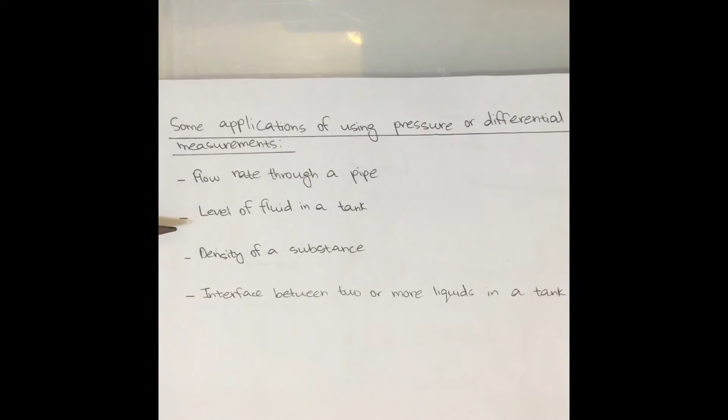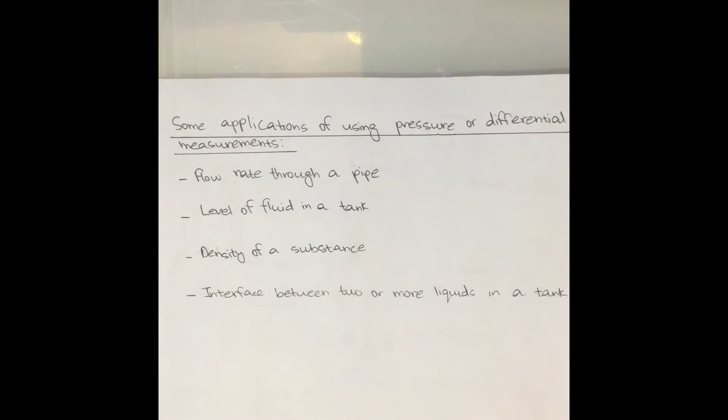It is important to accurately measure high pressure in many industrial processes to ensure their safe operation, to ensure that they work efficiently, and to ensure optimal quality control. Some applications of using pressure or differential measurements include measuring the flow rate through a pipe, the level of fluid in a tank, the density of a substance, and the interface between two or more liquids in a tank. In this video, the high pressure which we will be looking at is in the order of 100 bars and upwards.

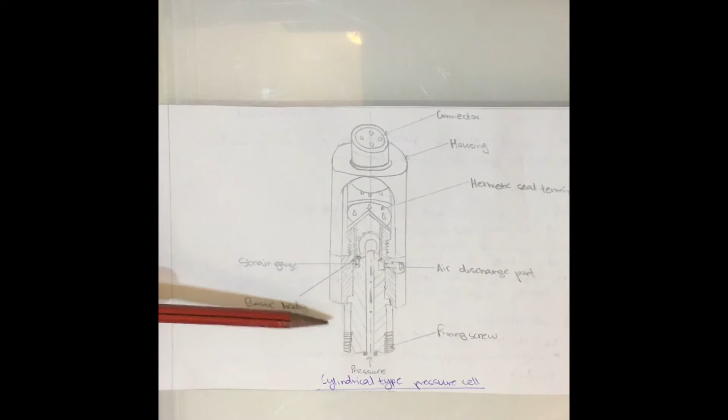The first type of gauge we are considering is the cylindrical type pressure cell, which is an example of a strain gauge. The main parts of this arrangement are as follows. It consists of a cylindrical tube with a hexagonal step at its center. This step helps fix this device onto the place where the pressure is to be measured. The bottom portion of the cylindrical tube is threaded externally and is open to receive the pressure to be measured.

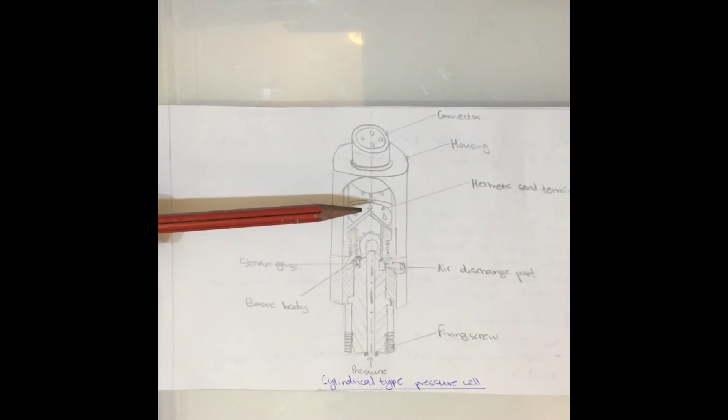The top portion of the cylindrical tube is closed and has a cap screwed to it. On the periphery of the top portion of the tube are placed two sensing resistance strain gauges. On the cap, which is the unstrained location, are placed two temperature compensating strain gauges. Now coming to the working of this type of gauge, the pressure to be measured is applied to the open end of the cylindrical tube.

Due to the pressure, the cylindrical tube is strained, that is, its dimension changes. As the strain gauges are mounted on the cylindrical tube, the dimension of the sensing strain gauges changes proportional to the change in dimension of the cylindrical tube, causing a resistance change of the strain gauges. The change in dimension of the cylindrical tube is proportional to applied pressure. Hence, the measurement of the resistance change of the sensing strain gauges becomes a measure of the applied pressure when calibrated.

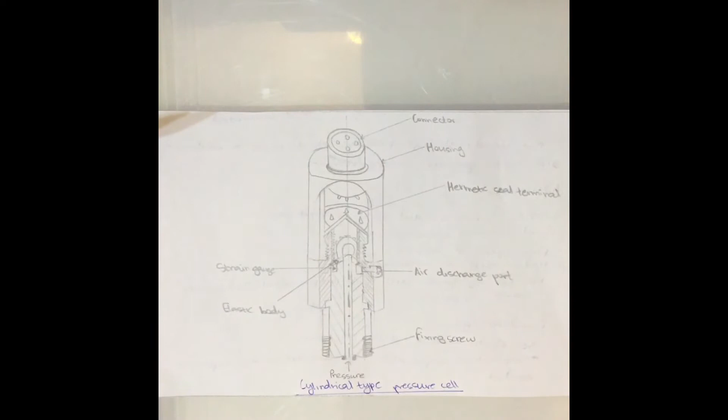The next instrument we will be looking at is the Bridgman gauge. This is used to measure extremely high pressures. The gauge must also be used at a constant temperature only and generally has an operating range from 0 to 1000 megapascal. But it's only usable at high pressure, as at low values of pressure the change in resistance value is very small because of the small value of the pressure coefficient of resistance.

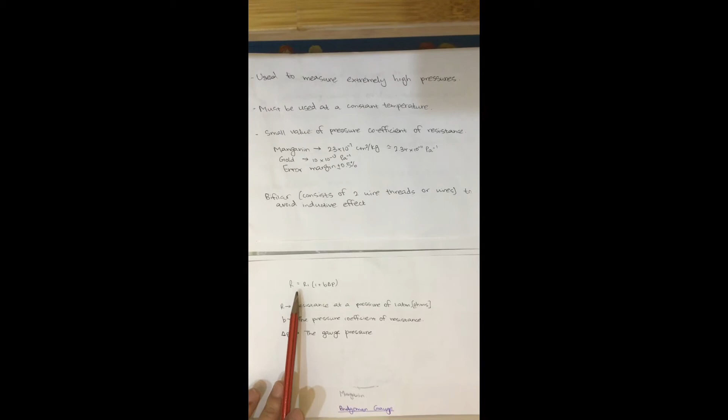It is known that resistance of fine wires changes with pressure according to the following linear relationship: R = R1(1 + B ΔP), where R1 is the resistance at a pressure of 1 atmosphere, given in ohms, B is the pressure coefficient of resistance of the material, and ΔP is the gauge pressure.

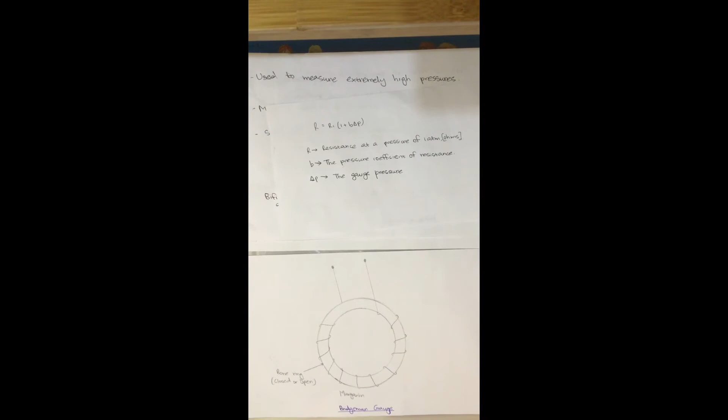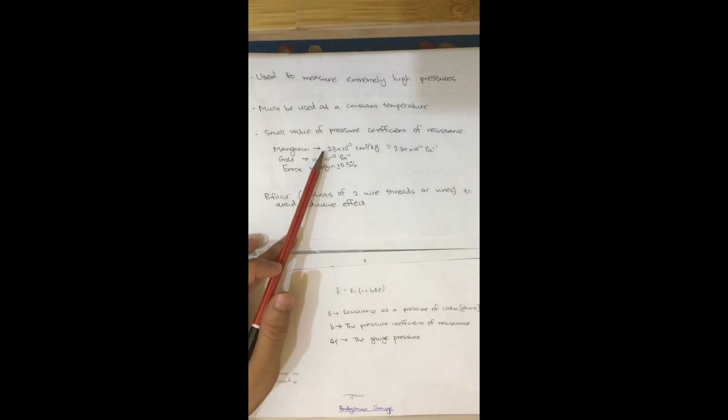The design of the Bridgman gauge has constantly been improving since its inception. It has a bone ring shaped structure with an insulated manganin wire having a pressure coefficient of resistance of 23 × 10^-7 cm² per kg, so that the total resistance of the wire is 100 ohm. A gold chromium wire pressure sensor may also be used. These wires have an error percentage of plus or minus 0.5.

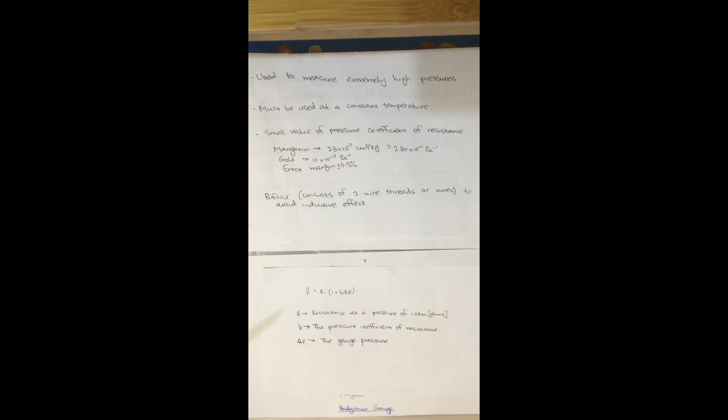Although the pressure coefficient of resistance of gold is 10 × 10^-12 per pascal, it is preferred to manganin in many applications as it has a resistance temperature coefficient which is 1/2 of manganin, and therefore its use results in lower errors on account of temperature changes. The winding is generally bifilar, which consists of two wire threads, for avoiding the inductive effect.

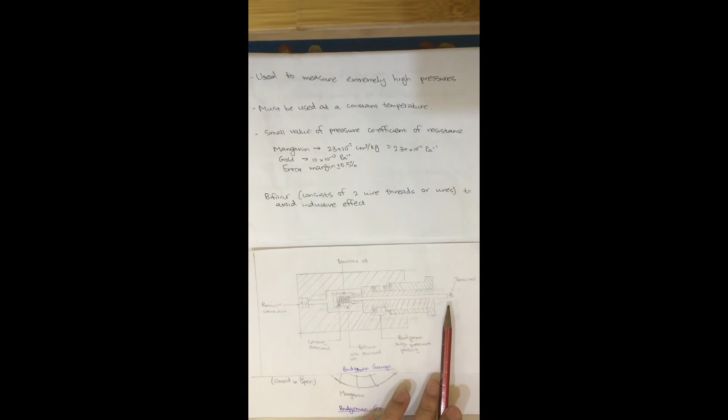The sensing element does not actually contact the process medium but is separated from it by a kerosene filled bellows. One end of the sensing coil is connected to a central terminal as shown, while the other is grounded, thereby completing the necessary electrical circuit. The fine wire used in a typical gauge is made of manganin or gold chrome.

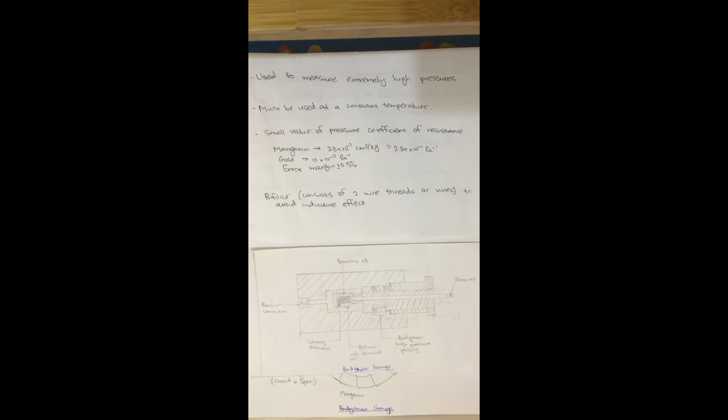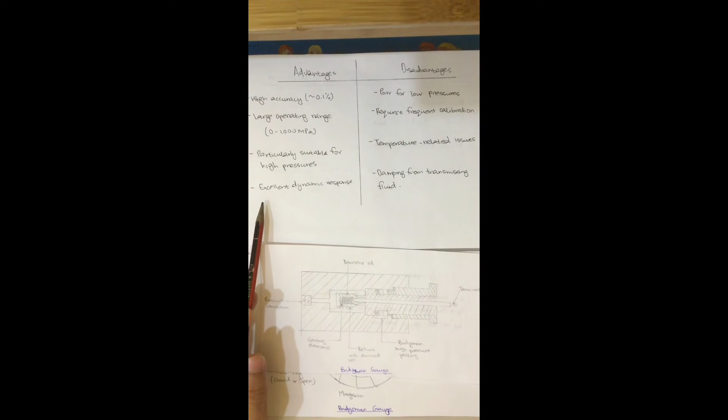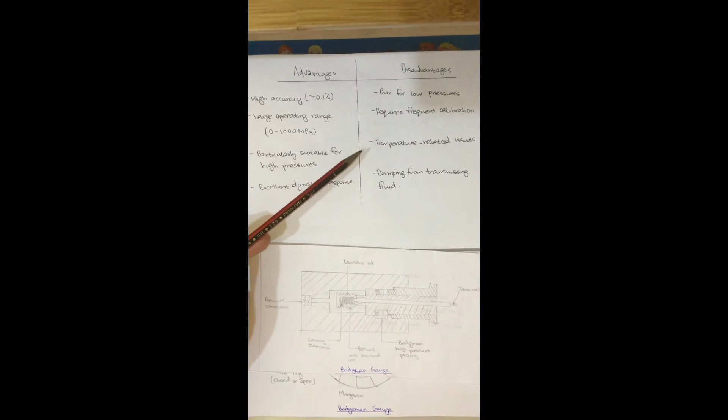The Bridgman gauge is popular for a number of reasons. It has a high degree of accuracy of roughly 0.1%. Its large operating range from 0 to 1000 megapascal gives it great flexibility, and it's also suitable for extremely high pressures. Along with this, it also has excellent dynamic response. However, it has a few drawbacks of its own. It is poor for low pressures, and it requires frequent calibration and temperature control. It also faces damping from transmitting fluids.

The product ranges of sensor manufacturers are usually tailored and optimized to different applications dependent upon the requirements. Only universal instruments allow the users themselves to select the suitable sensor principle. This is done only by the leading manufacturers, which give options for these. Other advancements include the use of digital manometers as well.

You can measure pressure in various areas using this instrument. You have the possibility of measuring negative pressure, overpressure, and differential pressure. Depending on the instrument, digital manometers can be used for liquids, gases, and air. It is very effective if the instruments have an internal memory, as it is not always possible to analyze the data only on site itself. This makes data storage an important feature from which you can benefit a lot.

These readings can hence be passed on using telemetry. Telemetry is the automatic recording and transmission of data from remote or inaccessible sources to an IT system in a different location for monitoring and analysis. In a general sense, telemetry works through sensors at the remote source, which measure physical data such as precipitation, pressure, and temperature, or electrical data such as current and voltage.